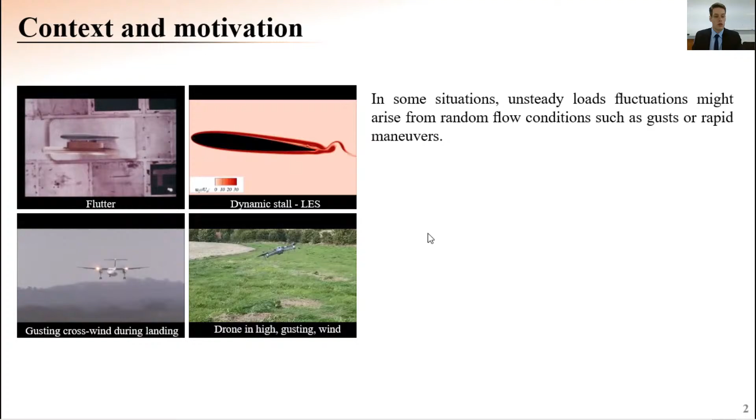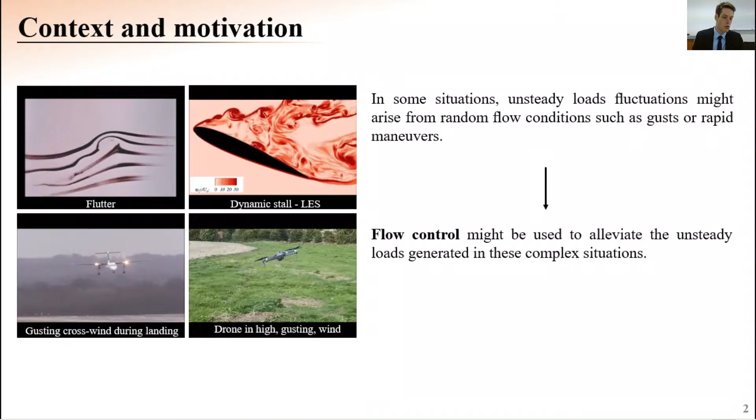I will present first the context and motivation of this work. From this video you see that in some situations, unsteady load fluctuations may arise from random flow conditions such as gust or rapid maneuver. Flow control is a valid tool that may be used to alleviate the unsteady loads generated in this complex situation, among other widely used tools. However, to improve control effectiveness, it is fundamental to understand and master the transient effects induced by actuation, and this is the main objective and core of this thesis.

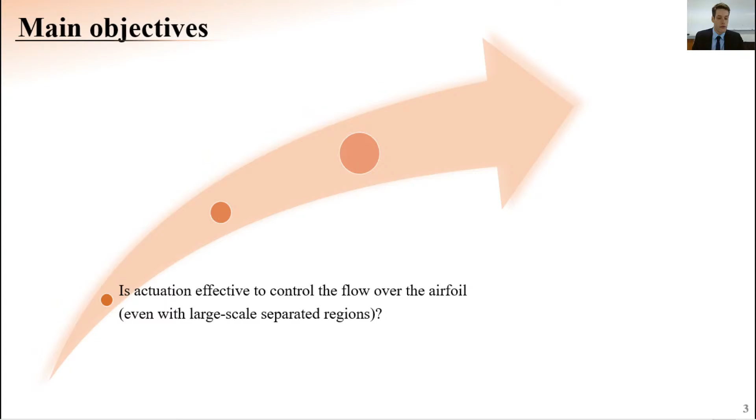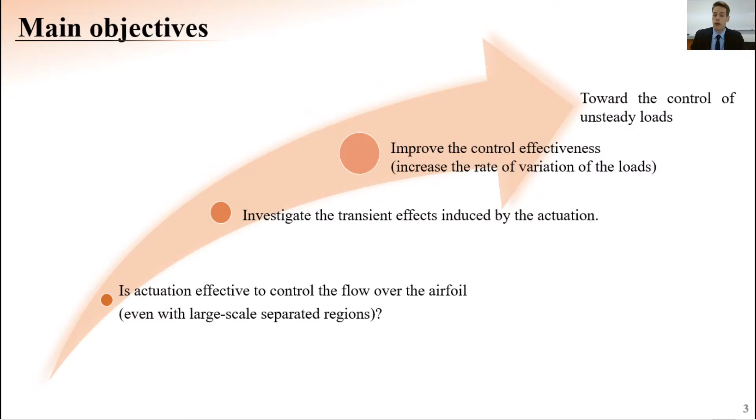In particular, we will start by investigating the effects of flow control over the airfoil, and whether it's effective even with large-scale separated regions. Then in the second part of this work we will investigate the transient effects induced by actuation, which is the main objective of this work, with the goal of improving control effectiveness, or in other words increasing the rate of load variation, with the perspective of giving useful insights toward the development of control strategies usable in real unsteady situations.

First I will present the background of this work. Then I will give some details of the experimental setup used to carry out the experiments, and then I will talk about the results. In particular, I will present first the baseline flow configuration over the airfoil, then the time-averaged effects of the control. Then we will go into the main part of this presentation, about the transient effects induced by actuation. So let's now talk about the background.

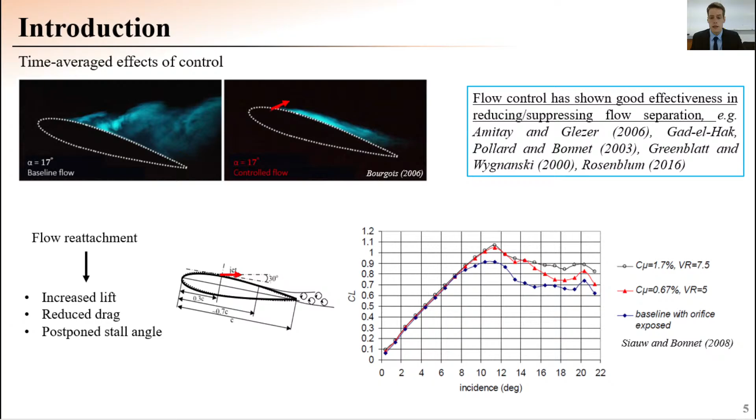This picture was obtained by Siauw under the direction of Professor Bonnet in 2008, and we see that if the actuation is applied, in this case from 30% of the chord, we are able to increase the maximum lift, but even the post-stall lift.

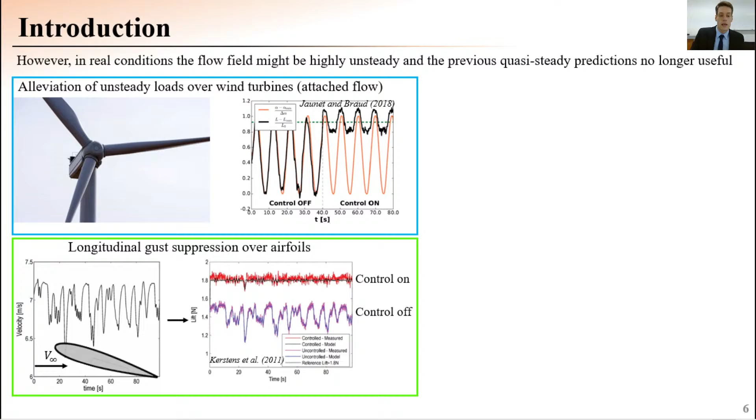However, in real conditions, the flow field may be highly unsteady, and so the previous quasi-steady prediction may no longer be useful, as you can see in these cases where I present several situations where the airfoil experiences unsteady loads. For example, in the case of wind turbines, or even when the airfoil experiences longitudinal gust, or in the case of a helicopter rotor, when the airfoil experiences dynamic stall.

In this case, control is used in an unsteady manner in order to alleviate the unsteady loads generated in these phases. So flow control may be exploited to alleviate unsteady loads in these cases, and so we need to exploit the transient effects of actuation to improve the control authority. For this reason, it's first of all necessary to investigate the transient phenomena induced by actuation. This is the main objective of this work, as I said before.

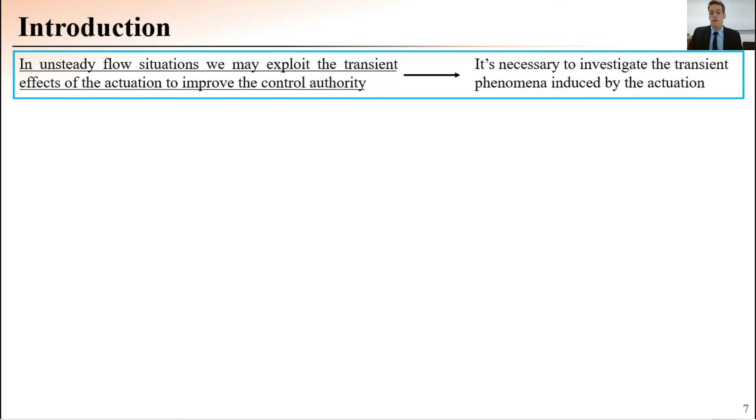For this reason, many authors in the last years have investigated the effects of the actuation onset and removal. For example, I mention here the work of Amitay and Professor Glezer, where they investigated the transient effects induced after the actuation onset removal.

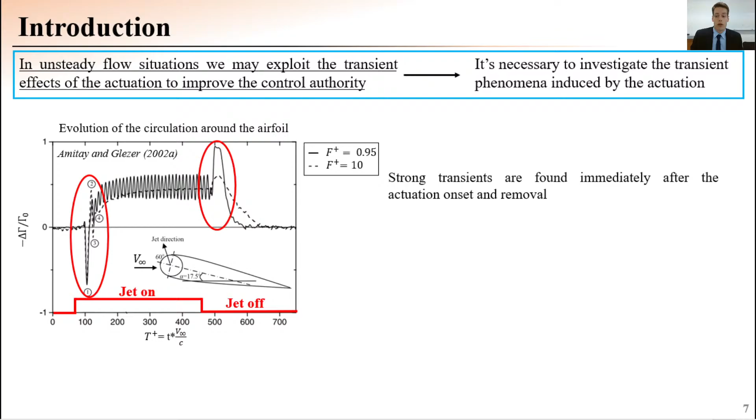In this picture, I present the variation of the circulation around the airfoil as a function of the normalized time T+. The normalized time is basically the ratio between the time in seconds and the convective time over the airfoil. You see that strong transients are found immediately after the actuation onset removal, and in particular, these transient effects were associated to the shedding of large-scale vorticity concentrations of alternate sign.

Another particular case that was very useful to understand the transient effects of the actuation is the case of single pulse actuation, which has a characteristic time scale very short compared to the convective time over the airfoil. Also in this case, you see that the single pulse actuation can induce a very strong circulation fluctuation around the airfoil that corresponds also to a lift fluctuation.

In particular, the maximum lift value is obtained after about 2 convective time scales. This time scale is quite short, but can be very long if the control is intended to control unsteady loads over the airfoil that can have characteristic time scales even shorter than the convective time over the airfoil.

For this reason, we asked if it's possible to enhance the control effectiveness by reducing the time to attaining the maximum lift, or in other words, we try to increase the rate of variation of the aerodynamic loads. This is the main objective of this work.

But let's first of all analyze the experimental setup that we used to perform the experiments. The experiments are performed in the subsonic wind tunnel of ISAE-ENSMA using a NACA 0015 airfoil model, having a chord of 35 centimeters and a Reynolds number of about 500,000. The transition is triggered at the leading edge in order to obtain a fully turbulent flow field along the chord.

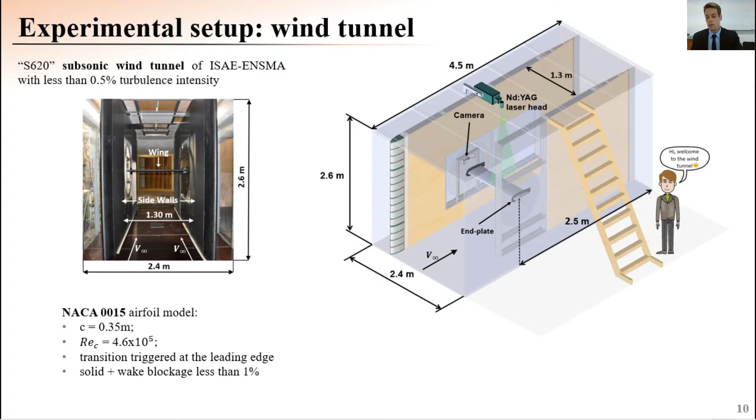The airfoil is mounted between 2 rotating discs that allow changing the incidence, and end plates are used to limit the interaction between the wall boundary layer and the surface of the airfoil. With this setup, we are able to increase the effective aspect ratio of the airfoil and to produce a 2-dimensional flow distribution along the span.

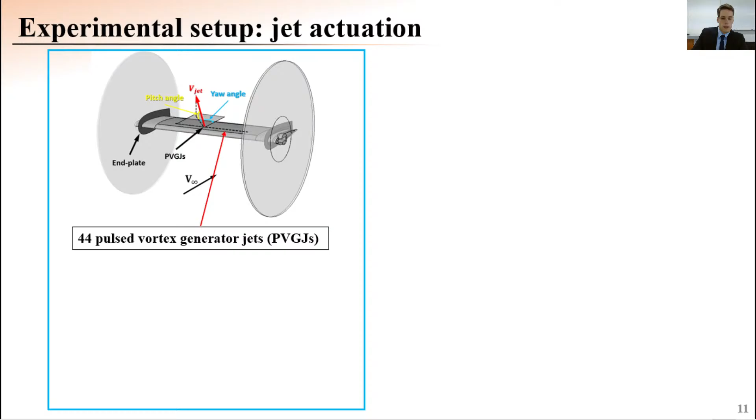The actuation instead is performed using 44 pulsed vortex generator jets that are embedded at 30% of the chord and are inclined with a yaw angle of 60 degrees and a pitch angle of 30 degrees. They are able to produce streamwise vortices, as you can see here, downstream, that enhance the mixing between the outer and the inner layer of the boundary layer and promote flow reattachment.

This setup in particular has been chosen from the literature because it allows for the maximum streamwise vorticity accumulation downstream of the orifice.

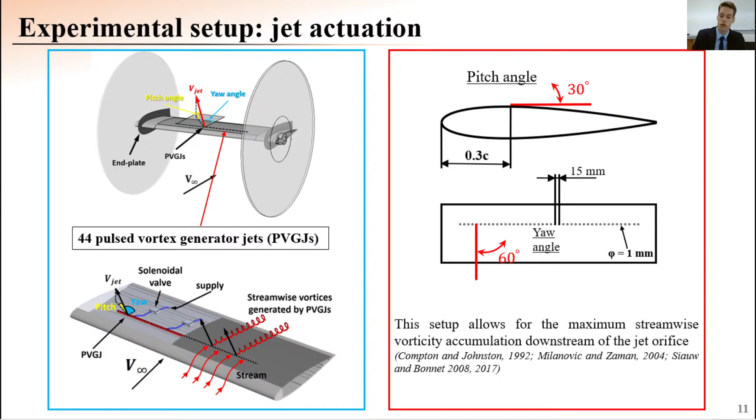The performance of the actuators is measured using hot wire anemometry, very close to the jet exit orifice. Here you can see the actuation response to several control laws. In particular, you see the response to single pulse control and to periodic control.

You see that the response delay is very short, and in particular in these experiments, a maximum jet velocity of 5 times the free stream velocity has been chosen because it was able to completely reattach the flow even at larger scale configuration, at high incidence with large scale separated regions.

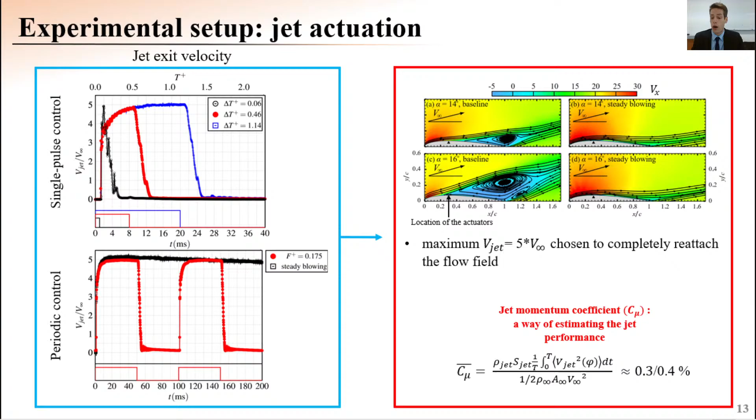With this maximum velocity, we were able to measure the performance of the actuation using the jet momentum coefficient, which is the ratio between the momentum flow rate of the jet actuation system and the momentum flow rate of the free stream. In this setup, it has been about equal to 0.3/0.4%, so it's very low.

To explore the transient phenomena induced by actuation, we performed unsteady static pressure measurements and flow measurements using PIV, both synchronized and phase-locked to the actuation trigger signal. It's important to know that all the PIV measurements I will present later are phase-averaged based on 300 images in order to reduce the uncertainty.

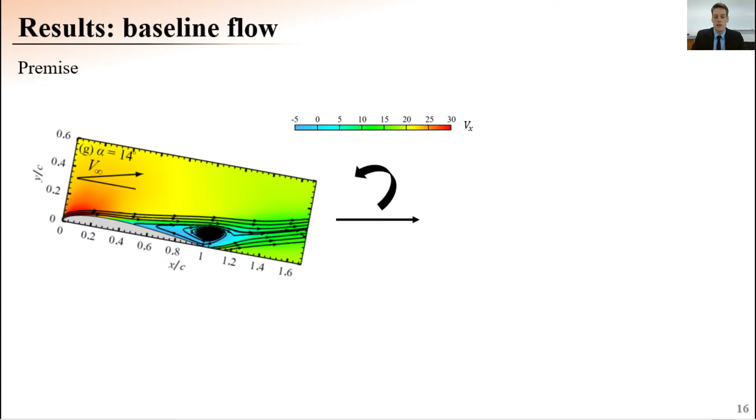So let's now go into the results. But first, I want to make a small premise before presenting the baseline flow configuration around the airfoil. We know that the flow in the wind tunnel is horizontal, so the free stream is parallel to the ground, and the airfoil rotates to create an incidence angle. But in this presentation, I will always rotate the frames in order to have the chord horizontal, for sake of simplicity of representation.

With this in mind, we can now analyze the streamwise velocity distribution around the airfoil. We see that for incidences below 11 degrees, the flow is fully attached, while a partially separated region appears for incidences above 12 degrees, and it reaches 75% of the chord at 16 degrees.

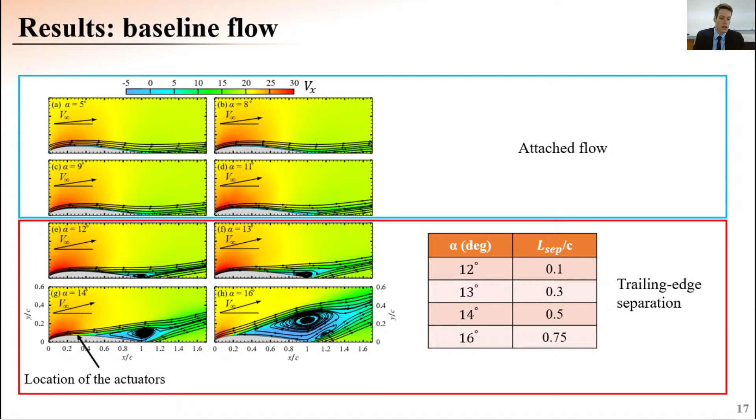For this reason, it seems reasonable to place the actuators at 30% of the chord, in order to be upstream of the separated region even for 14 or 15 degrees. So let's now analyze the time-averaged effects of the control, which is the starting point of our investigation.

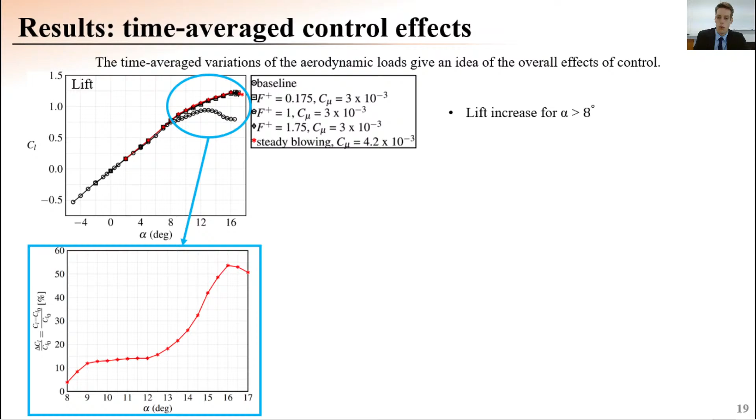We notice here the variation of the lift as a function of the incidence angle for several actuation laws. We applied both periodic control and steady blowing, shown in red, and we see that the actuation is able to increase the lift for incidences above 8 degrees, as shown in the picture below presenting the percentage variation of the lift.

The stall angle is also postponed from 13 degrees in the baseline configuration to 16 degrees in the controlled configuration. The highest increase of lift is obtained at 16 degrees because we are able to reattach a very large scale separated region, allowing us to strongly change the aerodynamic camber of the airfoil.

But not only the lift is affected by the actuation, but also the drag, which is the pressure drag in this case. It's remarkably changed above 8 degrees, as before, but it's interesting to notice that we have a pressure drag increase for incidences below 14.5 degrees, and a pressure drag decrease for incidences above 14.5 degrees.

Let's explain this behavior by analyzing the pressure distribution around the airfoil at 14 and 16 degrees. We see here there is a big difference in the pressure distribution around the airfoil.

We see that there is a very strong suction near the leading edge in the case of 16 degrees, because, as seen before, in this situation we are able to reattach a very large scale separated region. The change of aerodynamic camber we obtain increases the suction near the leading edge. This action results in pulling the airfoil in the upstream direction, corresponding to a drag decrease.

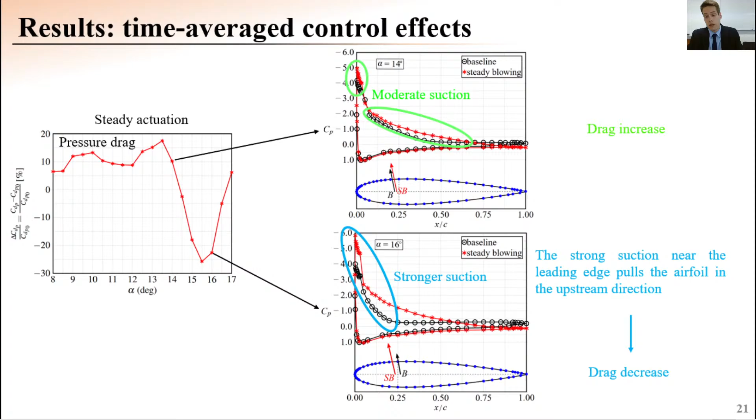In the case of 14 degrees, instead, we obtain a drag increase because the predominant effect of the actuation is a suction near the half chord, which pulls the airfoil in the downstream direction, increasing the drag.

Not only the lift and drag are affected by actuation, but also the maneuverability. We see here the variation of the pitching moment coefficient, measured with respect to the quarter chord, with the incidence angle, and there is a remarkable moment variation for incidences above 8 degrees.

There is a pitching moment decrease for incidences below 14.5 degrees, while the opposite occurs for incidences above 14.5 degrees. To explain this phenomenon, we need to analyze the variation of the center of pressure induced by actuation.

Let's first remember what the center of pressure is: it's the point where the resultant of the aerodynamic force is applied. Since the moment is measured compared to the quarter chord and is positive in the pitch-up sense, if the center of pressure moves downstream, it means that the moment is decreasing. Indeed, we see this here for incidences below 14.5 degrees.

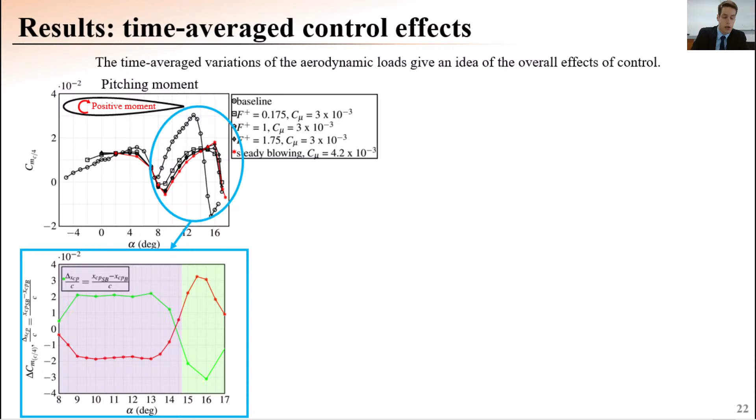While for incidences above 14.5, the pitching moment is increasing because the center of pressure is moving upstream. We can visualize this by analyzing the distribution of pressure around the airfoil for these two incidences, and we see that at 14 degrees the center of pressure moves downstream because of the suction near the half chord, which pushes the center of pressure downstream, while for 16 degrees the strongest suction near the leading edge is able to change the center of pressure, moving it upstream, which corresponds to a moment increase.

Another important feature we can notice from this picture is the postponement of a strong nose-down pitching moment from 13 degrees in the baseline configuration to 16 degrees in the actuated configuration. This corresponds to postponing the stall angle of the airfoil, confirming what we already observed with the lift coefficient, also with this curve.

So in this first part of the presentation, we have analyzed the time average effects of the actuation. In particular, we have seen that the actuation is able to increase the lift and reduce the drag for high incidence, which corresponds to beneficial effects for efficiency, but also affects the maneuverability of the airfoil. Indeed, we have seen that actuation has a very strong influence on the pitching moment.

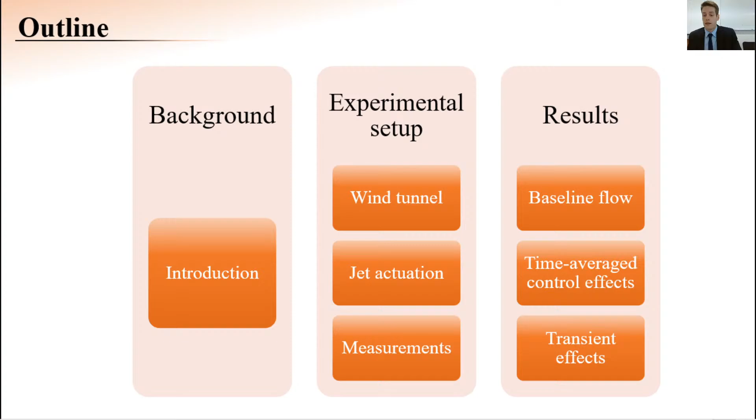Let's now go into the main part of this work, because the understanding of the time averaged control effect is very important, but is very common in the literature, and it's not the main objective of this work. We will focus instead on the transient effects induced by actuation. Let's now investigate the transient effects of actuation, and try to answer our previous question: is it possible to enhance the effectiveness of the actuation using a fine-tuned control?

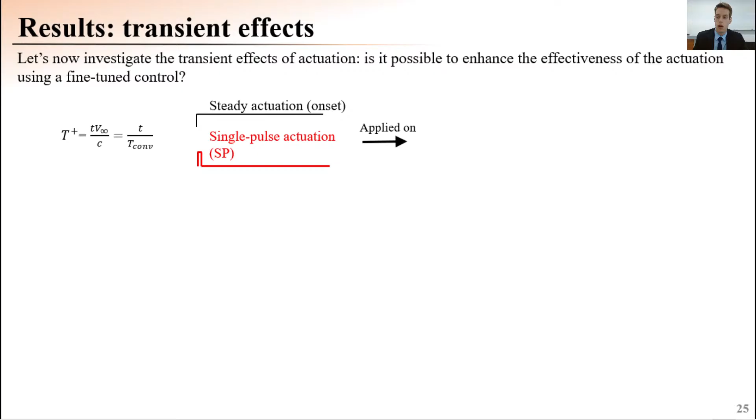For this reason, we test many actuation durations, in particular many single pulse actuation durations, compared with the steady blowing onset. We test this configuration both over attached and partially separated flow fields, but for simplicity, I will only present the case of a partially separated case at 14 degrees, where separation starts from mid-chord, because it's the most representative case.

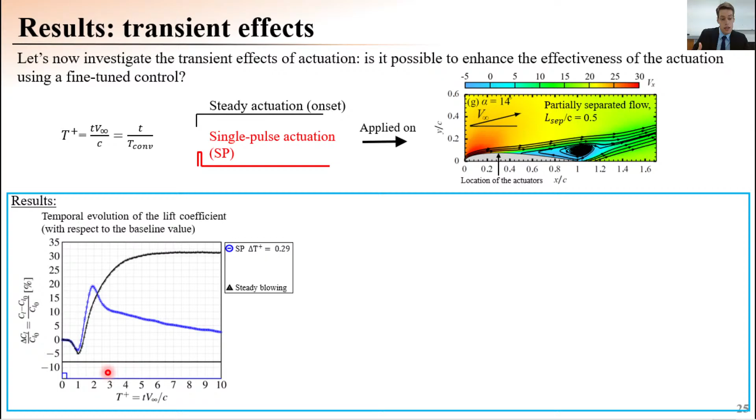What is the result? The result can be seen by analyzing the evolution of the lift coefficient as a function of the normalized time t+. In particular, we see that the single pulse actuation induces a very different lift response compared to the steady blowing.

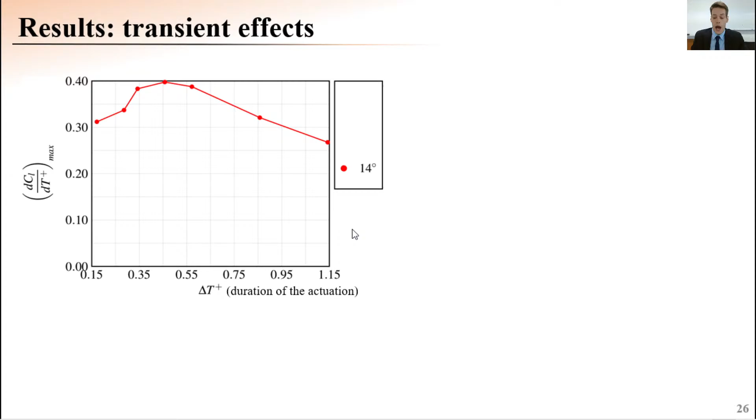We can also notice from this picture that the maximum rate of lift variation is obtained for a pulse duration of about 0.5, in particular for delta t plus 0.46. This can also be understood by analyzing this other image, which represents the variation of the maximum derivative of the lift coefficient as a function of the duration of actuation. We see that for 14 degrees, the maximum rate is obtained for delta t plus 0.46.

This is also the case for other partially separated flow fields for incidences above 12 degrees, while a different behavior is found for 16 degrees, where the actuation is applied from inside the separated region, inducing different flow dynamics. For this reason, we cannot clearly evidence the maximum, while for other partially separated configurations, we can see that the maximum is obtained for an actuation duration of about delta t plus equal to 0.5.

For attached airfoils, instead, the maximum derivative is only slightly affected by the pulse duration, and for this reason, we will not go into details of this case, but you can find all the more details in my PhD dissertation.

So let's consider the case of 14 degrees, being the most representative, and let's try to explain what is the physical mechanism responsible for the improvement of the rate. First, to explain this, we need to compare the single pulse actuation of delta t plus 0.46 and the steady actuation, to explain the dynamic and why the response of the flow is so different between these two cases, and then we will try to explain what is the physical mechanism that leads to maximizing the rate of lift increase.

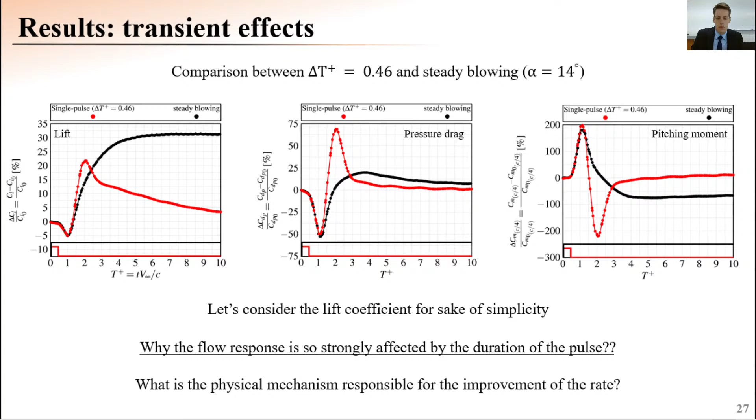It's important to notice that not only the lift coefficient is affected by the single pulse actuation, but also the pressure drag and the pitching moment, which are affected even more strongly than the lift. However, we will talk about the lift coefficient for sake of simplicity, and we will try to explain the physical mechanism responsible for the improvement of the rate.

We can explain this by analyzing the evolution of the flow field over the airfoil, represented here as the distribution of the span-wise vorticity concentration over the airfoil. In the baseline configuration, the flow is separated from half chord, and a negative layer of vorticity is detached from the airfoil from half chord.

This is the signature of the separated shear layer. If I play the video now, you see that after the actuation onset, the separated shear layer is shed downstream, while upstream the flow becomes fully reattached over the airfoil as a consequence of the single pulse actuation.

If we now compare this flow response to the case of the single pulse, we notice very different behaviors. In the case of the single pulse actuation, we notice the formation of an unsteady separation bubble near the half chord, which moves downstream up to reach the trailing edge, and then it opens.

So we can now explain what is the effect of this bubble on the lift evolution. For this reason, I put on the right of this figure the evolution of the lift and of the derivative of the lift that I showed before.

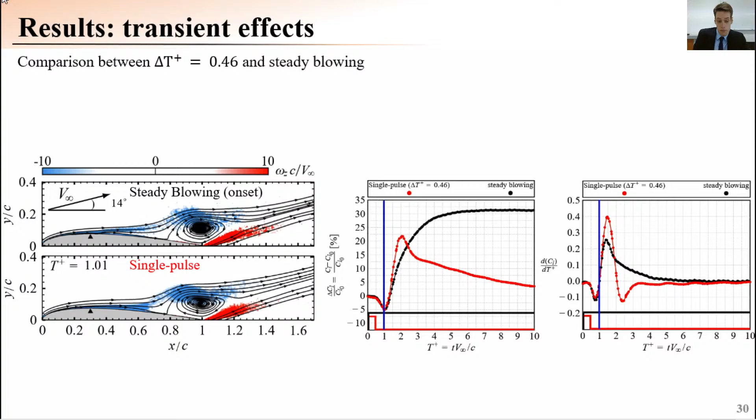If I play the video again, we see that at the same phase when the bubble is created, we also increase the rate of the lift compared to the steady blowing. So it seems there is a very strong correlation between the formation of this bubble and the increase of the rate of lift variation. We want to understand why this bubble induces this strong increase of the rate.

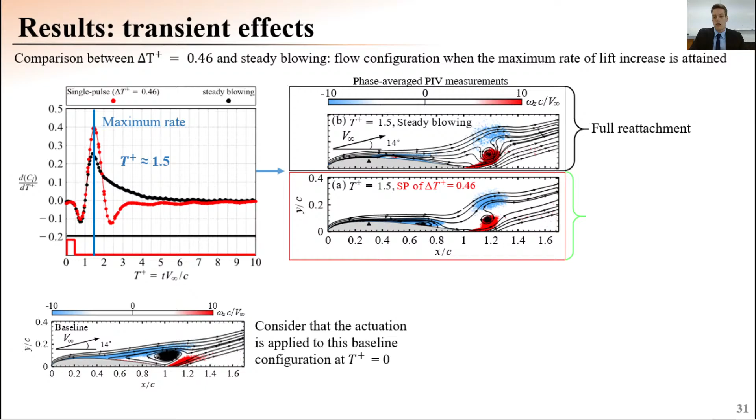For this reason, we analyze the pressure distribution over the airfoil at, for example, an instant of time when the maximum is obtained, remembering that in the case of the single pulse, we obtain the formation of the bubble.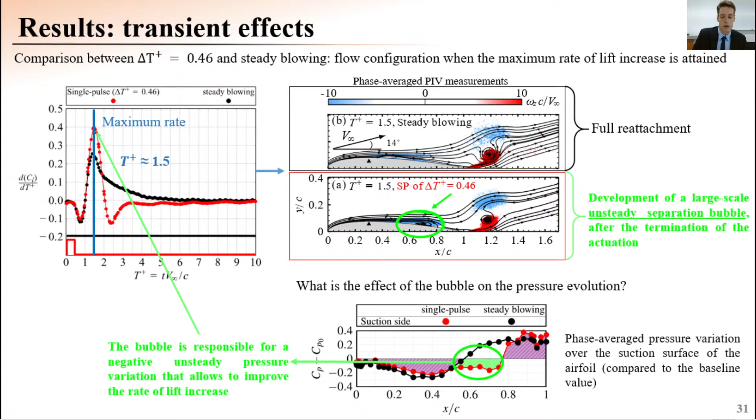So we have understood that the bubble has a very big effect on the lift evolution. But to characterize the dynamical evolution of the flow field, we need to follow the progression and evolution of this unsteady separation bubble. In other words, we need to detect the instantaneous position of the reattachment point downstream of the bubble, which is represented in the case of streamlines as a moving saddle point.

However, it's important to notice that we cannot use the interpretation given by streamlines, because streamlines are calculated in an Eulerian field, an Eulerian perspective. That means they are calculated with a reference system which is fixed with the airfoil. In an unsteady case, they can really diverge from the actual particle trajectories, and so they are not representative of the real transport behavior over the airfoil.

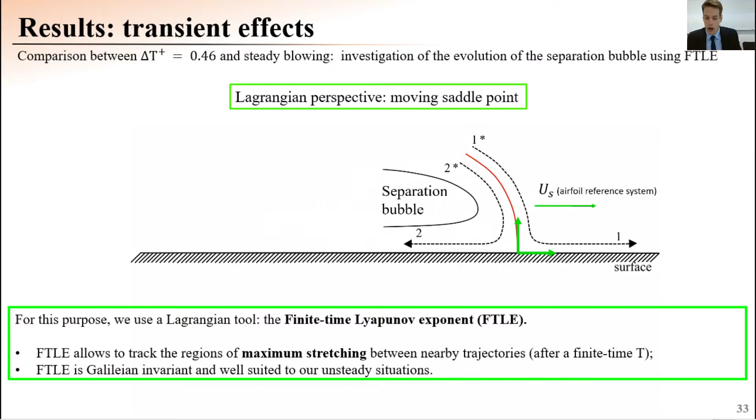For this reason, we need to analyze the flow field with the Lagrangian perspective. That means we need to use a reference system which is fixed with the saddle point, moving with the saddle point - in this case, the reference system in green. For this reason, we use the Lagrangian tool, the finite-time Lyapunov exponent, that allows us to track the region of maximum stretching between nearby trajectories after a finite time t. The FTLE is Galilean invariant, and so is very well suited to our unsteady situation.

Let's give a brief introduction to the FTLE. In particular, if we consider the advection of a grid of particles using forward integration from time t0 to time t0 plus t.

If we consider that phi is the flow map that tracks the movement of this particle, we can calculate the spatial gradient, for example by central differencing of the flow map. It's very well known from the literature that the maximum stretching between nearby trajectories occurs in the unit direction associated with the largest eigenvalue of the matrix A transpose A, that we call lambda max.

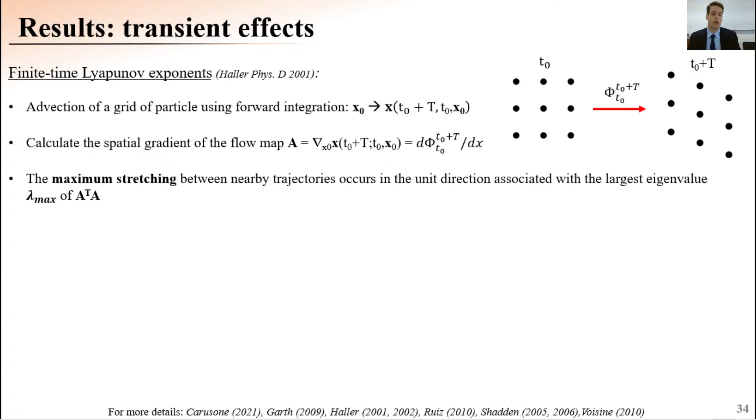With this in mind, we can now define the FTLE as the logarithm of the square root of lambda max for 1 over the integration time t. The FTLE sigma is calculated in every point in the PIV domain at every instant of time, and it provides the maximum exponential divergence over a finite time interval, t0 to t0 plus t.

So if we are able to calculate the FTLE value in every point of our PIV field, we can detect the ridges of the FTLE field, represented here in red. The intersection between this ridge and the surface of the airfoil gives the instantaneous position of the attachment point in a Lagrangian perspective.

In our study, we calculated the FTLE using phase averaged PIV fields based on 300 images each, and the time step to compute the particle trajectory was chosen as 0.25 millisecond, with the flow integrated using the Runge-Kutta fourth order algorithm. An integration time of 25 milliseconds was used to calculate the FTLE because it was enough to clearly reveal the unsteady topological evolution of the flow field.

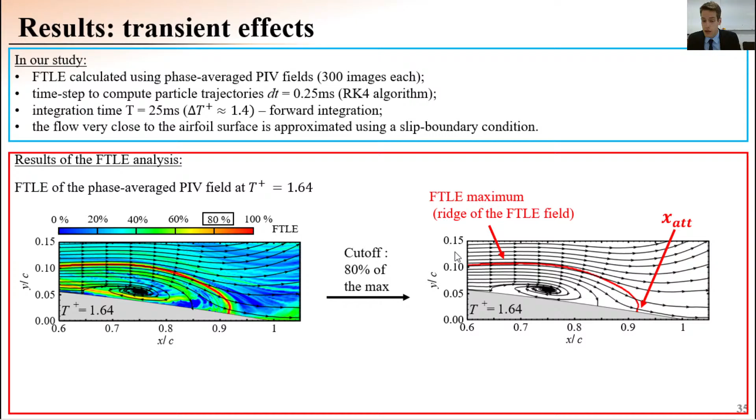You see here this red line that unambiguously reveals the position of the attachment point over the airfoil. The reattachment point is calculated on a line very close to the airfoil surface and very close to the region resolved by PIV, with a spatial resolution of about 0.2% of the chord.

At t plus equal to about 2, it reaches the trailing edge. It's not a coincidence that at this instant we also obtain the maximum value of the lift. We can remember that this bubble is responsible for a negative unsteady pressure over the suction surface. When this bubble reaches the trailing edge, this negative region of pressure extends all over the suction surface of the airfoil, providing the maximum lift.

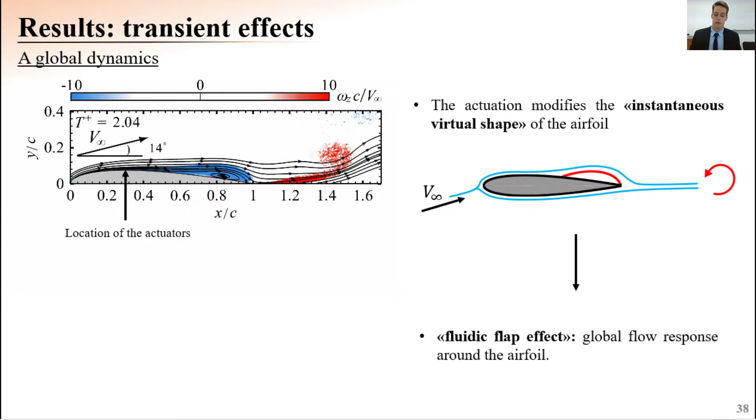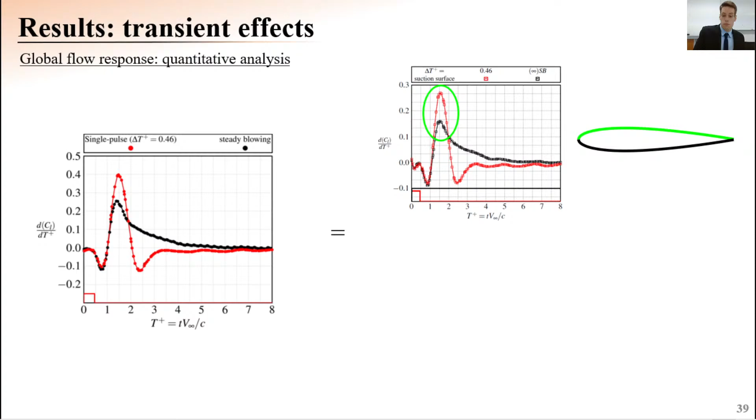However, to take into account the integrated effect of all the pressure over the airfoil, we split the contribution to the derivative of the lift coefficient into two components: the component corresponding to the suction surface and the component corresponding to the pressure surface of the airfoil. In both situations, both suction and pressure surface contribute to the improvement of the rate of lift increase, so the phenomenon is global.

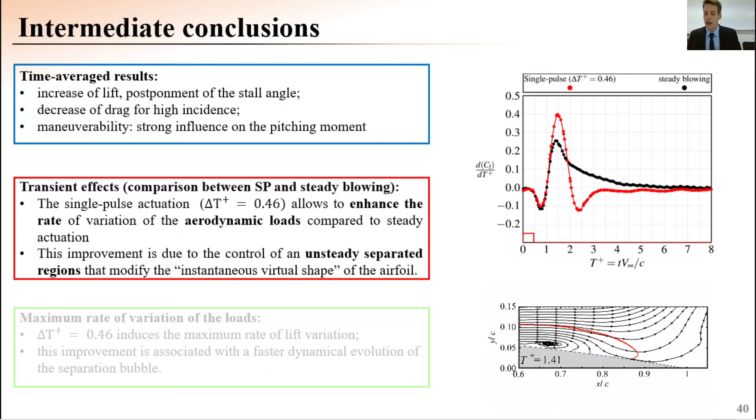In this second part, we compared the transient effects induced by single pulse actuation and steady blowing. We have seen that the single pulse actuation is able to enhance the rate of variation of the lift, or in general of the aerodynamic loads, compared to the steady actuation. This improvement is due to the control of the formation of an unsteady separated region that modifies the instantaneous virtual shape over the airfoil.

Let's now go into the third part of this presentation. Having understood the physical mechanism leading to the increase in lift rate, we now want to understand the mechanism leading to maximizing the rate of variation of the loads.

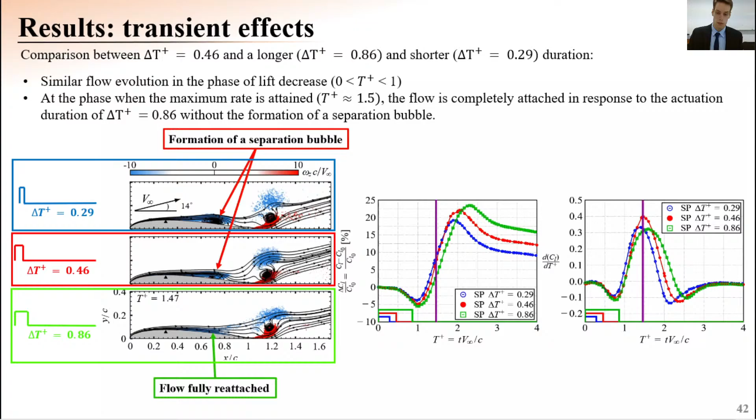However, it's still strange that for both 029 and 046 we have the formation of the bubble, but we find very different loads and very different rates in these two cases. In particular, 046 induces higher rate compared to 029. So we want to explain this by analyzing the evolution of the separation bubble.

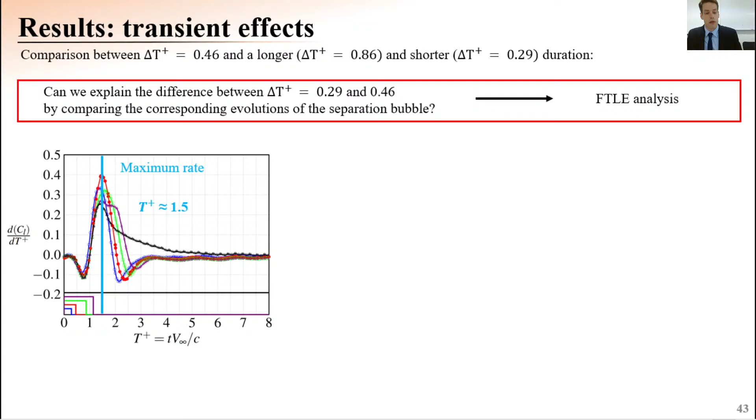Using our dear friend, the FTLE tool, we take an instant of time at t plus 1.5 and compare the FTLE fields for these two cases. Since this actuation is switched off earlier for 029, also the bubble is formed earlier. So it's expected, and proved by this picture, that the reattachment point is closer to the trailing edge for the shorter actuation duration, downstream compared to delta t plus 046.

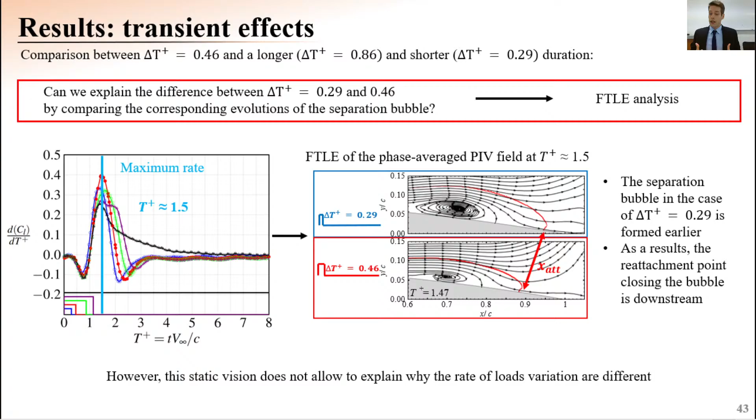This is proved by analyzing the evolution of the attachment point for these two cases. The red line, corresponding to 0.46, shows a faster movement of the attachment point downstream of the bubble compared to the blue one, 0.29. The velocity in the case of 0.46 is 20% of the free stream velocity, while for 0.29 it is 12%. So we find a much slower evolution for 0.29 and a faster dynamics for 0.46.

What is the effect of this faster dynamical evolution of the bubble for 0.46? Since we have a faster progression of the attachment point downstream of the bubble, we expect, and also proved, a higher rate of variation of pressure per unit time, which corresponds to a higher lift rate. But it's now time to explain why we have such different flow dynamics between these two cases.

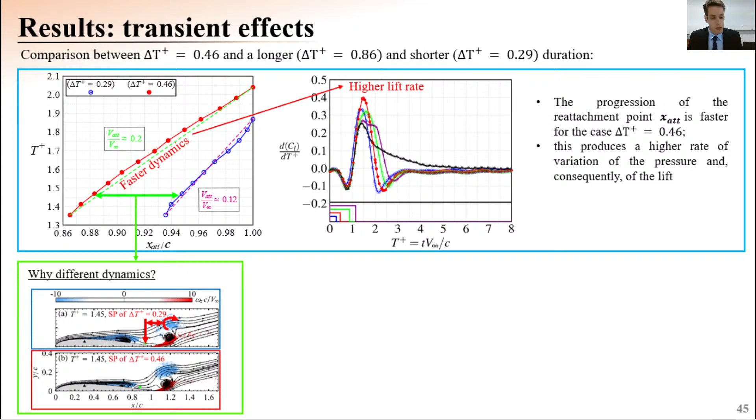We can explain this by analyzing the evolution of the flow field at a generic instant of time, for example at t plus equal 1.45. If we analyze the vorticity distribution for these two cases, plotting the corresponding position of the attachment point downstream of the bubble, we see that in the case of 0.29, the reattachment point is closer to a larger scale negative vorticity concentration downstream of the trailing edge.

And what does it mean? It means that, as we have seen in the dissertation, the shedding of this larger scale vorticity concentration associated with the shedding of the separated shear layer induces an adverse pressure gradient upstream.

Since this point in the case of 029 is closer to this large scale negative vorticity concentration, it's expected that it feels a higher adverse pressure gradient than in the case of 046. For this reason, it's expected to move slower than in the case of 046.

So in this third subsection, we have compared three durations of the single pulse: 029, 046, and 086. We have seen that 046 induces the maximum rate of lift variation because the bubble formed in this case has a faster dynamical evolution compared to the shorter case.

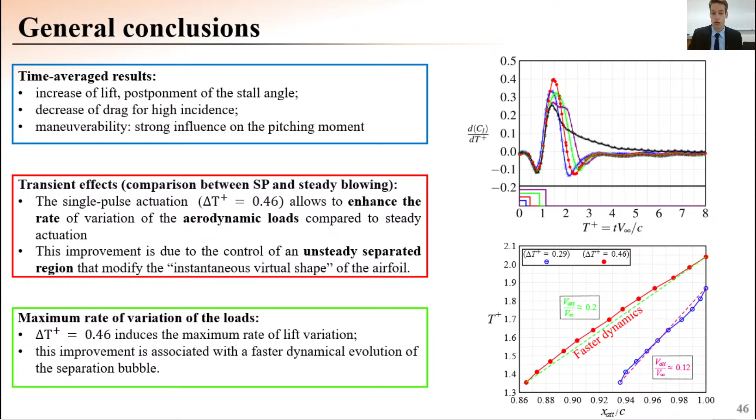While in the longer duration test, the bubble is formed too late, very close to the phase when the maximum lift is obtained, and for this reason it has no beneficial effects on the lift increase. So it's important that the optimal duration of the actuation is a compromise between the instant at which the bubble is formed and the corresponding flow evolution and pressure distribution on the airfoil at this phase.

I hope that with this presentation and this work, we have given useful insights into understanding the transient effects of the actuation. However, we can still perform some parametric investigation to find the parameters playing the major role in enhancing the rate of variation of the aerodynamic loads.

For example, the time when the bubble is formed, or the pressure distribution, the pressure gradient at the point when the bubble is formed. Mastering these actuation parameters can be very useful to implement physics-based closed-loop control strategies that can improve the actuation performance even beyond the current limitations.

However, the control strategies that have been tested in this situation have been applied over well-defined quasi-steady flow configurations, as we have seen for the case of 14 degrees, when the separation appears from half chord. However, it will be very interesting to test if these control strategies are effective in real unsteady flow configurations.

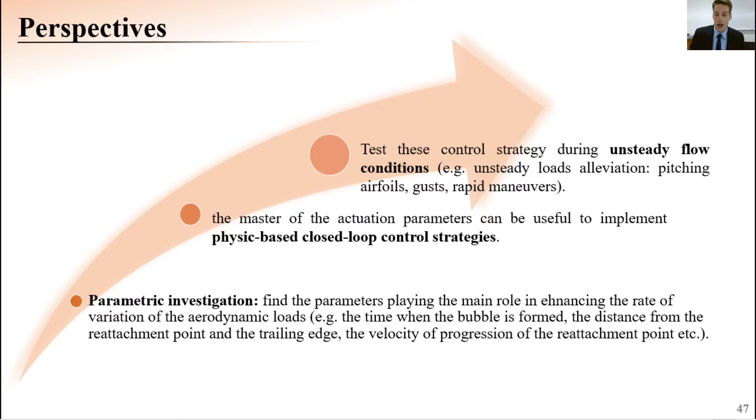For example, during pitching airfoil, so dynamic stall, or during gust, or during rapid maneuver. And so we can test if, in this situation, these actuation laws that we tested are able to alleviate the unsteady loads.

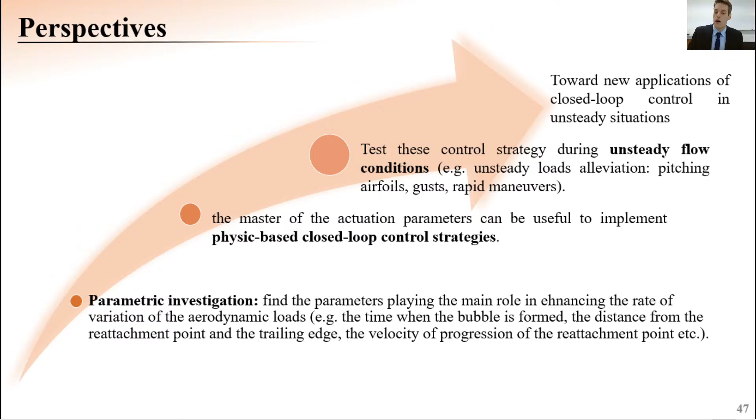For example, we can think to apply our unsteady control to alleviate dynamic stall over helicopter rotor, to alleviate the unsteady loads in the case of wind turbine blades, or even to control the maneuverability of aircraft, for example in the case of a drone, or even to control the maneuverability of a dirigible.

So I want to thank you very much for your presence here, and I'm looking forward to your useful insights and comments that will surely help to improve my work. Thank you very much.

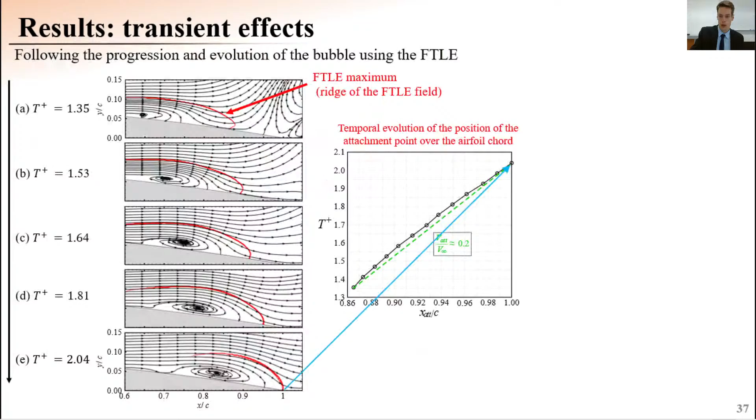Yes, for example, it was here. You can see that this red line, this ridge, actually separates two different regions of the flow field that have a very different topological behavior. One of the most important properties of this red line is that there is no mass flow rate between the lines. So if you calculate the instantaneous separation over the airfoil, you want to divide the dead air zone into the separated region and the flow with a certain velocity.

You can do this by analyzing the FTLE value, which gives you exactly the difference between these two regions. It's an indicator of the real topological behavior, or real flow transport over the airfoil. For this reason, it's more accurate to predict the instantaneous position of the attachment points compared to streamlines, so we preferred to use FTLE to detect the position of the reattachment point. I don't know if I was quite clear or not.

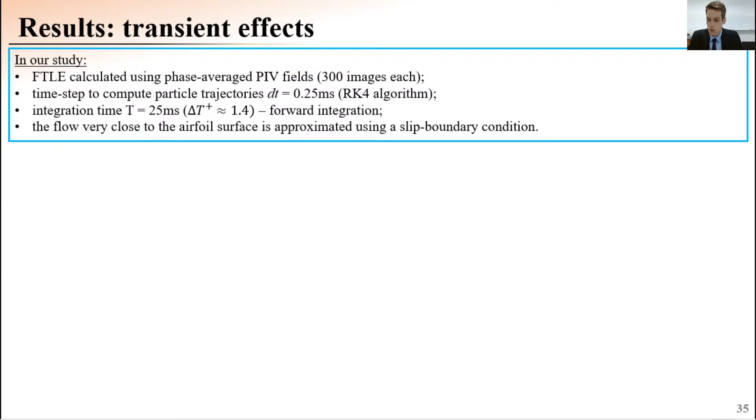And the difference between, you have three plots there, and this is all from memory: the transient actuation was nominally smooth, you didn't get the oscillations, and the time periodic actuation had slightly different CMU, however you defined it. But the time periodic actuation yielded higher lift and the same drag as the pulse actuation.

So obviously I'm biased towards pulse actuation, but you look at this result, and if I'm Airbus or Boeing or whoever, in that order probably because you guys are in France, I'm asking myself, why should I bother? I think it's this plot, right? I'm asking myself, why should I bother?

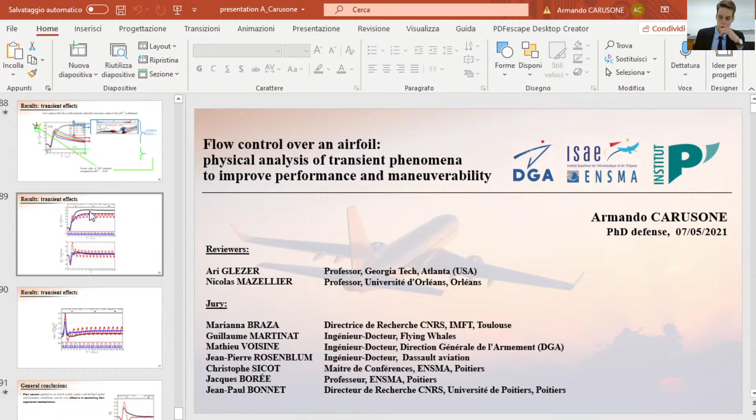I mean, I can get slightly better results with the time periodic actuation. Yes, the CMU is a little bit higher, but the drag is the same. Actually, with higher CMU, I'm getting more lift. Right, of course. There's less hardware, I don't need to worry about this pod stuff and so on. Why should I even bother with that?

You're completely right, indeed it's not very easy to sell this product in this situation. Now you know why I have a lot of white hair.

No, I want just to reply. For this reason, I carefully read your comments, and so I prepared a slide to try to explain why Boeing should buy my product. I should buy it first, but it's okay. I'm sorry. No, anyway, you are completely right.

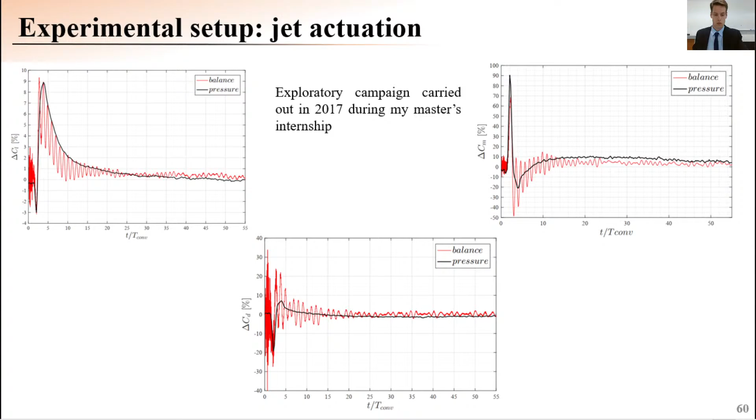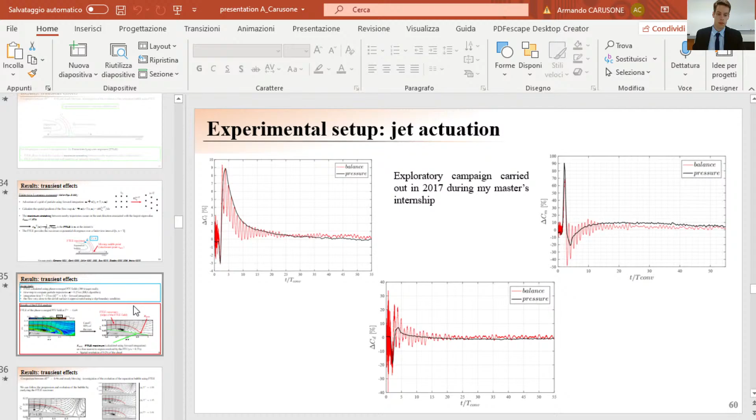You said that you have a slip condition that you use close to the wall, so it's like the method is using a potential flow. Is that correct? Is it coming from the method itself, or because you have no way of making something else?

Actually, near the surface of the flow, although we used a very special paint for PIV and took all the care to ensure there were very few laser reflections, the flow in a region of 5 millimeters height next to the surface was strongly affected by laser reflection. So we could not accurately analyze the flow field in this region using PIV. It was too inaccurate; the uncertainty was very big, and I was not sure the vectors in this region were right even with all the care we took. For this reason, we preferred to replace this 5 millimeter height region with a potential flow field calculated basically using a slip boundary condition.

With this method, I also tested another kind of measurement: I tried putting the velocity on the wall equal to 0 to test if there was any difference, and also tried without this boundary condition. We did not see a strong difference in the position of the red line, because the scales of the region resolved by the slip boundary condition are very small compared to the transport scales of the phenomenon. So we don't have any problem detecting the red line even with this small assumption near the wall. It worked, and we had no problem compared to other methods, or without it - that's why we used it.

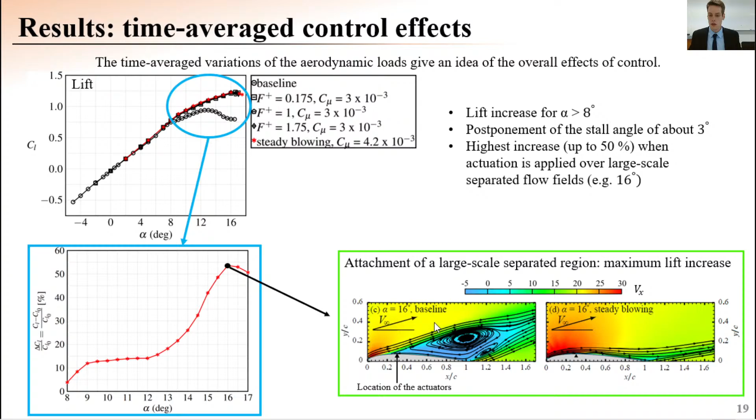However, if you take into account this configuration, we see that the flow is fully attached. But if we take the pressure variation in this case, we see that there is actually a very strong suction near the leading edge, and this is the same effect as what we registered in the steady case. So even if there is no bubble downstream, we have a strong suction near the leading edge.

So actually, this suction is not related to the presence of the bubble, but is related to the fact that by creating the bubble and modifying the flow in the near wake, we are changing the instantaneous aerodynamic shape of the airfoil - this is something I've read a lot about in the papers of Professor Glezer. In other words, we are increasing the camber.

By increasing the camber, we are moving the stagnation point toward the trailing edge, and this corresponds to having an airfoil with a higher camber, which will result in a higher suction near the leading edge, even if there is no bubble at all. So it's just the aerodynamic shape of the airfoil that induces this change, it's not related to the bubble.

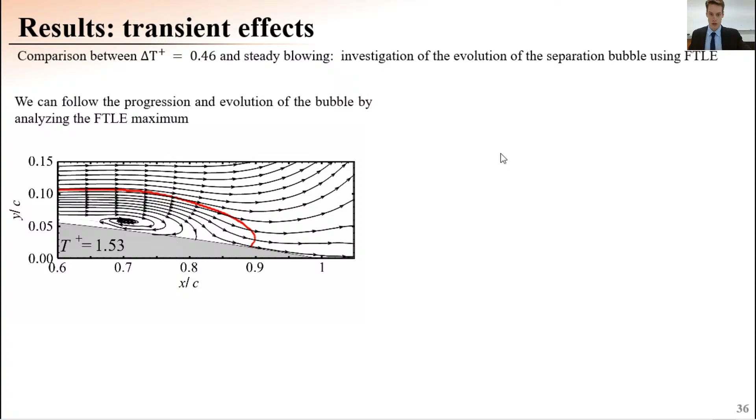Actually, you see that this bubble, this reattachment point is not only moving toward the trailing edge, but the bubble itself moves toward the trailing edge. And so there is a closed part which is also moving. And indeed, just upstream of this bubble, the flow becomes reattached. So what we obtain is what I showed in the figure just here: a closed bubble with the flow just attached upstream, and a shedding of vorticity in the near wake.

And actually, if we compare these schematics that I have shown here with the baseline case, it's like we are operating with an airfoil with a higher camber, and the stagnation point moves toward the trailing edge. So we have suction in this zone because we have reattachment flow, and also because we changed the camber.

However, this suction will also continue below the bubble, because since we have a separation bubble, the pressure is fixed at the point of separation. So actually we have an unsteady pressure, a negative pressure that will develop below the bubble. And when the bubble moves downstream, we have suction here because the flow reattaches, suction downstream, below the bubble. So we extend the suction all over the surface. I prepared another slide to show this.

Here, for example, we see that at T+2, the bubble has almost reached the trailing edge. And if we compare the pressure evolution for the lift, we see that the negative variation of the pressure has reached the trailing edge almost. Indeed, before the bubble, the flow is attached, so the pressure is decreasing because there is suction. And downstream, below the bubble, the pressure stays at almost the same value as at the separation point. So we have a depression even below the bubble, which reaches almost the trailing edge.

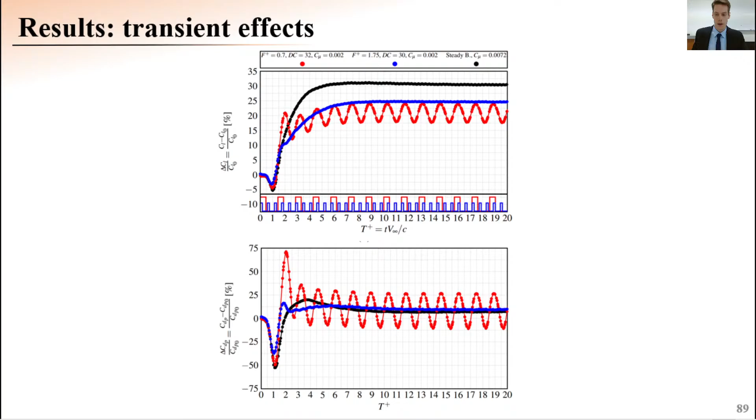And my last question is about the point you took at the end of chapter 5, close to the trailing edge on the pressure side. This is interesting because, thinking in terms of application, you need a sensor to make some feedback control, and this was quite interesting.

However, I'm not very clear about why this point is so interesting, because if you look at figure 5.9 where you compare the evolution of the pressure, at this point close to x over c equal 1, you don't see much difference between pressure side and suction side. So this point seems to have no effect on the lift compared to others which are much more sensitive to the pulsation effect. Can you clarify this point?

Yes, I was expecting this question, because I read your report, and of course you are right. If you look at figure 5.9 in the manuscript, or even the other one comparing different durations of the single pulse, it appears we don't have much difference in pressure variation between single pulse and steady blowing.

However, I will show it in two cases. We can analyze the pressure variation for steady blowing and single pulse, for example from this video, which is exactly the same video as before. I will plot the evolution of the pressure—sorry, this is only on the suction surface. This is the same graph I showed in the manuscript, showing the variation of pressure on the suction surface, just to clarify.

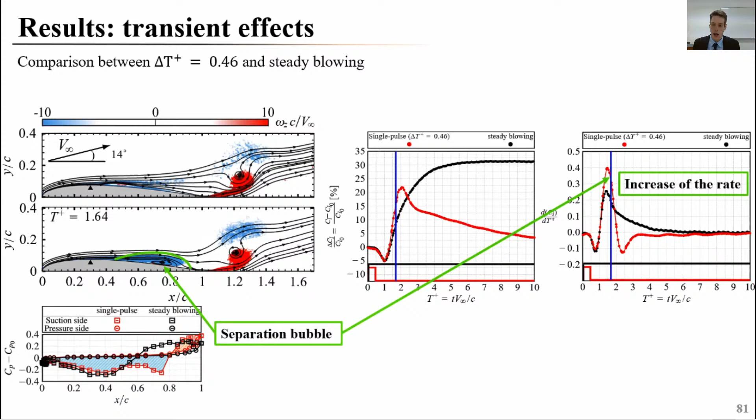I tried at last to explain this global effect by taking some points near the trailing edge and looking at the lift there. I found that the evolution of the pressure at this point was very close to the global lift evolution.

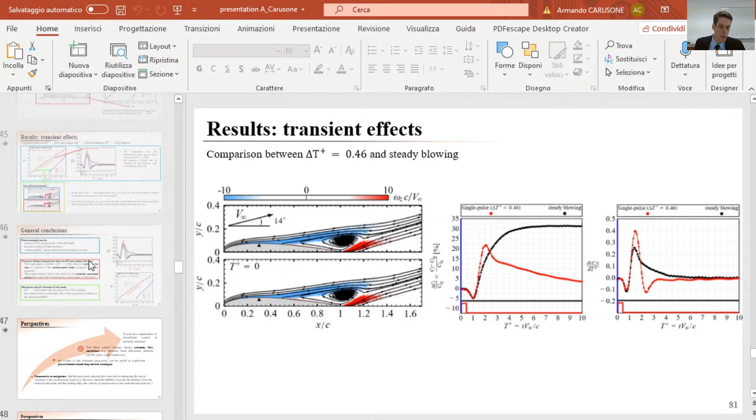This was quite interesting because if we would like to develop closed-loop control strategies based on the physics of the phenomenon, we could measure the pressure just at some points near the trailing edge and infer what's happening to the global lift evolution around the airfoil—like a sort of indicator. This is very interesting. However, I agree we must also look at the integrated effect of the pressure over the whole pressure surface.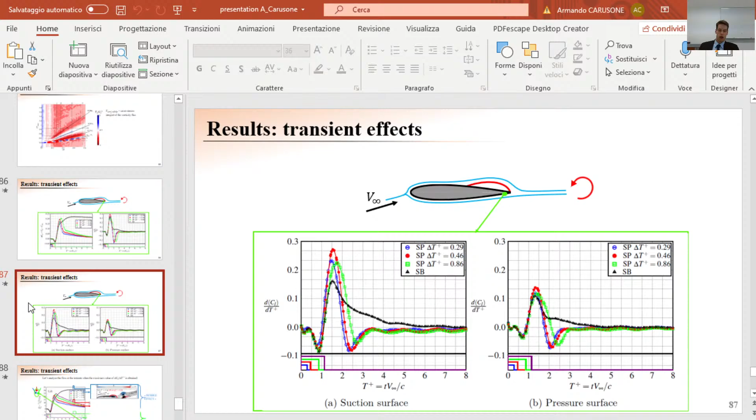So if we now look at incidences below, for example, 8 degrees, the ratio between the pressure drag and the total drag is below 50%. So the skin friction drag has a really big impact on the total drag. For this configuration, you are completely right, and indeed if we perform actuation here, we will not only modify the pressure drag a bit, but we will surely increase the skin friction drag, because we are putting momentum in the boundary layer, and this increases the skin friction drag.

So we would expect the drag to increase even higher than what we measured. However, for high incidences, for example above 12 degrees, and especially above 14 degrees, the total contribution to the drag is given by the pressure drag, because we have a big separated region. So at these incidences, when we experience an increase of efficiency, it's a real increase of efficiency, even taking into account the skin friction drag, because its contribution to the total drag is very small, less than 10%. So even if we increase the skin friction drag a bit, it doesn't have a big effect on the total drag reduction we obtain, for example, at 16 degrees.

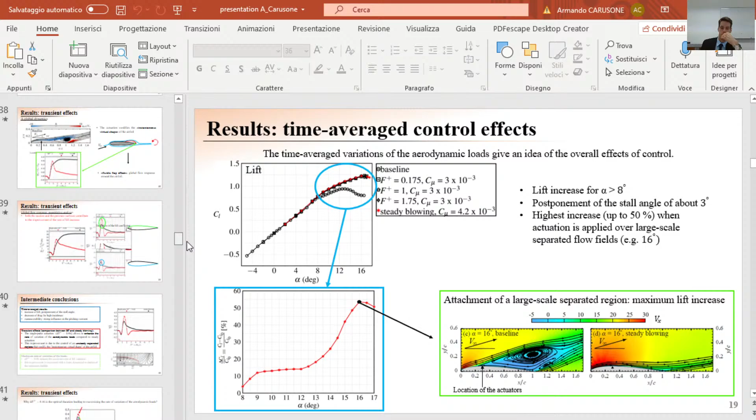And showing that, I believe, for a shorter period it doesn't work as well as when it's a bit longer, and if it's even longer you're getting back to something close to continuous control. Yes, exactly. So I had a question on that, because if you have constant... yes, exactly, it's on this one. Okay, so 0.46 for what you're looking at is basically an optimal.

On what you're looking at, however, I believe that if you have constant actuation you have the same mass flow rate as a function of time. So you're putting more energy into the flow in the case of 0.46. So have you tried to check, and if I understand correctly, when you have a period of 0.86, basically what's happening is that the acceleration and deceleration of the jet are too decorrelated, and you're not getting the transient effect that leads to the spike in lift. Have you checked something at constant energy of control? Meaning that if you're extending the period, you have to decrease the intensity of the jet, and compare all that, because then you're at constant cost.

Yes, you're completely right to ask this question, and I think it's important to clarify this point. Unfortunately, I didn't check changing the duration of the pulse while keeping the same mass flow rate, because we had to fix a parameter that was the same for every duration, and we fixed the maximum velocity. So we performed all durations of the single pulse with the same maximum velocity, fixed at 5 times the free stream velocity.

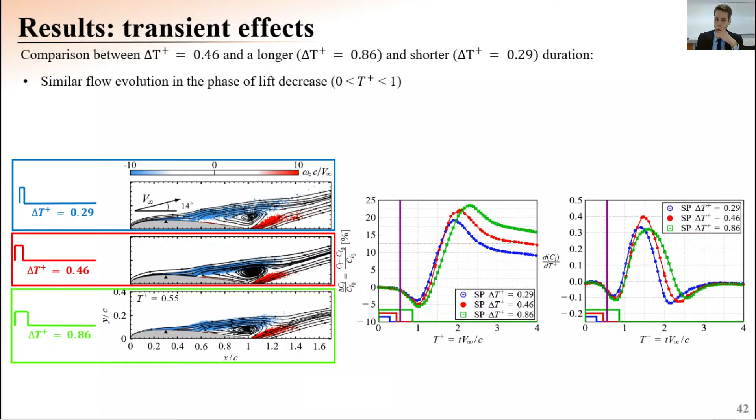One of the key differences is that we don't have wings, we have tailplanes, and it's a very low aspect ratio, so highly three-dimensional flow. How do you think your work would translate to something where the flow is actually perpendicular to the leading edge? When you look at straight lines, it's something like 20% of the span, maybe 50% of the span, but not more. Do you think you could still achieve some kind of control, or would the flow be too complex to control?

And the second question, maybe you can answer both together. You mentioned gust often, and when you do your control you have a spike in lift, but there's something you don't control much: the relaxation time to reach something identical to your inlet condition. However, with a gust you don't control anything - you have the gust with the velocity it has, the direction it has, and the length it has. So sometimes you can get hit twice in a very short amount of time, or a very long gust, or something very short. Do you think that down the line this is something you could control, meaning the length of your controller and being able to control everything in a very short amount of time?

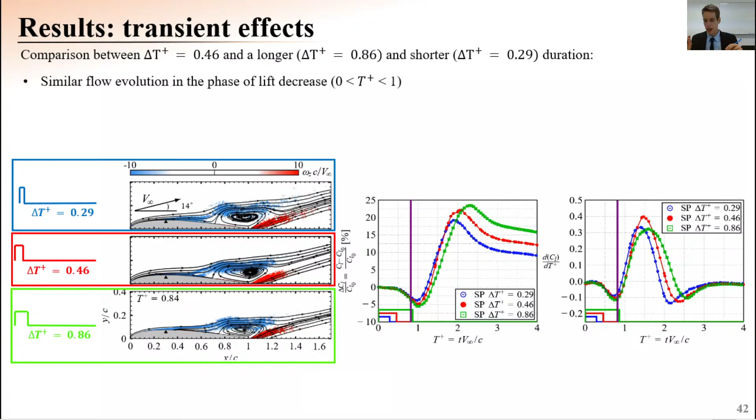However, we have seen in the transient case that we are exploiting two different dynamics if we are far upstream of the separation point versus, for example, very close or even inside the separation zone. This can be clear by looking at this picture I presented before.

We see that for the case when the actuation operates from upstream of the separation point, we have a very similar behavior at 12, 13, 14, and 13.5 degrees. But at 16 degrees, when we operate from inside the separated region, we have a different behavior, because we are generating a very different flow dynamics response.

However, in the time-averaged case, our interest is to reattach the flow field, no matter what the transient dynamical evolution is that leads to this attachment. So whether we are upstream or next to the separation point, we are able to reattach the flow field, and this will lead to a lift increase, but we are not interested in the dynamical evolution that leads to this attachment.

Instead, in the case of the transient evolution, the position of the actuation really changes the dynamical evolution of the flow field induced by the actuation onset. So there are two cases to treat separately: the time-averaged case, where we're interested in reattaching the flow field, and we've seen that actuation just upstream of the separation point is widely known from literature to be best.

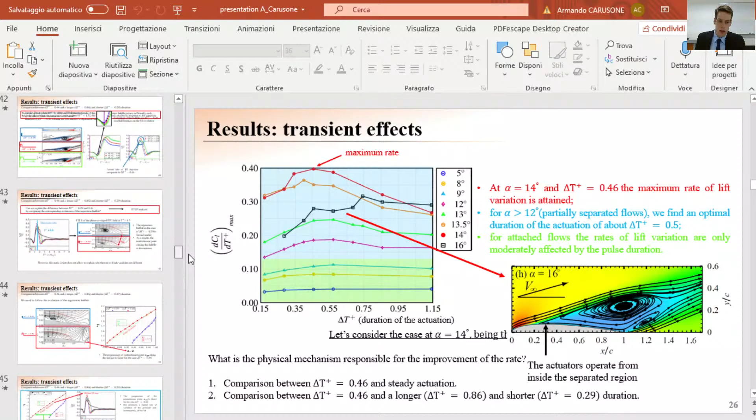I think that if I take this case, for example, the bubble does not develop. In the case of the PIV measurements, they are quite close to the surface of the airfoil. The resolution, the accuracy of the PIV is accurate all over the field, except in a region which is 5 millimeters in height. I don't think that in a region of this height we can have the development of a separation bubble that we didn't capture.

However, I am also sure of this because I looked at the pressure variation. I don't have the picture on the slides, but in the dissertation we can compare the variation of the pressure for the case of delta T plus 0.86 with, for example, 0.46, and we notice that this negative pressure, this suction that is generated by the bubble, is not present for the case of 0.86. This gives an idea that the bubble is not developing in this case. So I'm pretty sure that there is no bubble developing earlier for the case of 0.86.

And you see it on the pressure distribution for the last time, since it appears at the end, for this last time which is T plus equal to 2.23 or something like that. Do you see the effect of this vortex on the pressure distribution? Yes, but I clearly don't see the development of the bubble.

Okay, yes. First of all, let me clarify a point before answering this question, because this field that we are looking at is averaged, but can be considered as instantaneous because it's phase averaged. The measurements are phase locked to the actuation signal, and so the lift that you see here in this picture is phase averaged based on many phases. Actually, we can consider it as instantaneous.

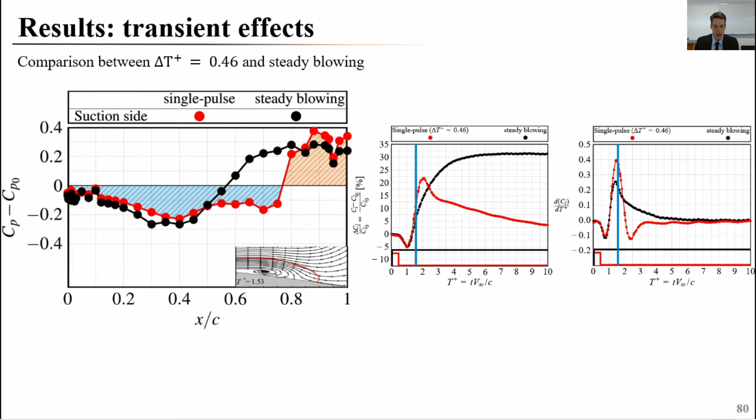What increases the rate of variation of the lift is the fact that the rate of variation of the pressure per unit time, the temporal derivative of the pressure, is higher than in the case of steady blowing. I checked it and compared the evolution of the bubble with the rate of variation of the pressure per unit time, and I've seen that it's highly correlated with the presence of this bubble and a higher temporal derivative of the pressure. So it's actually this bubble that allows the rate to increase.

There is a very strong correlation between the presence of the bubble and the higher rate of lift increase, because it's associated with a higher rate of variation of the pressure per unit time.

Yeah, I think it's my fault. I want to clarify on a phase average: for example at T+1, you have a lot of different instantaneous fields, which give you different pressures. Ah yes, okay, now I get it. It's the dispersion of the pressure and velocity field at this time. Wait, I'm sorry, no, I misunderstood, I didn't understand the question. Actually your question is to correlate the bubble with the dispersion of the pressure at this instant. If we see the average field, you have an average evolution of the phenomenon, but I am asking if on instantaneous fields you have a lot of differences, or if you are really close to the average field.

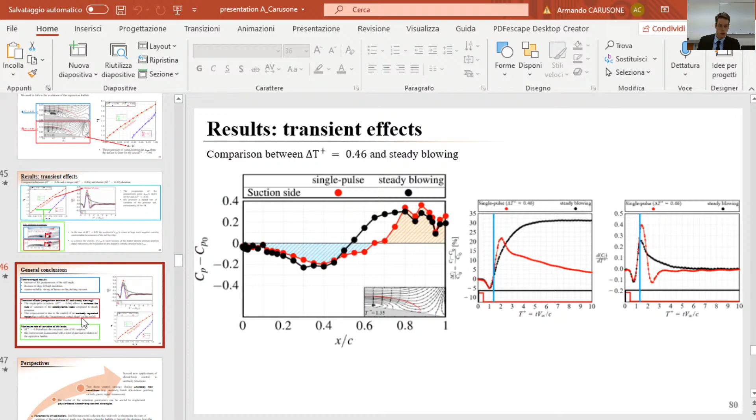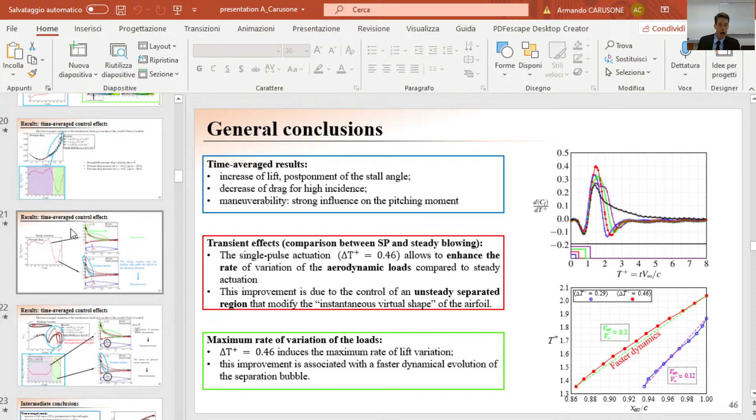Yes, now you had presented, I think in transparency 46, that the drag decreases at high incidence, you said so I think. Well, at the moment you said that you also have a decrease of drag at high incidence. Maybe I did not note exactly the number of the transparency. I'm sorry, so I think this is the one. Is this the one, professor? Yes, oh yes, okay, okay.

So you say that for the high incidences you obtained a decrease, as we see, yes, of the drag. Can you explain physically how this is achieved? This is very important, of course. I expected this question because it's a very important question, I think. For this reason I prepared a special slide.

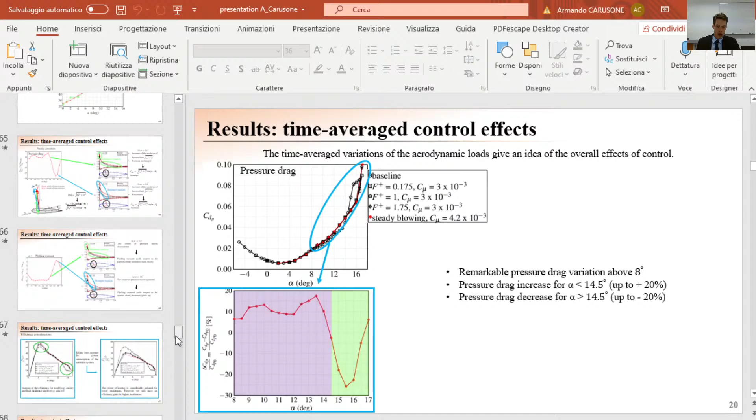I hope I will find it. First of all, it's the first thing to find this slide. Just one second. Yes, this one, okay. Now if you look at this slide, actually, I will present it very, very fast because it's getting late, and my advisor also tells me it's getting late, so I will try to present it very fast.

So actually, if you take for example the quarter chord and we apply the total aerodynamic force at this point, we can decompose this force into the body reference system, obtaining T and N. So we can write the coefficient of the force as the square root of Cn squared plus Ct squared. So if we now want to get the drag, the pressure drag is basically the square root of Cn squared plus Ct squared times the sine of the angle alpha, that is the incidence, minus the angle theta, which is the angle between the normal to the chord and the force direction. So if we retain this expression, CdP equals square root of Cn squared plus Ct squared times sine of alpha minus theta.

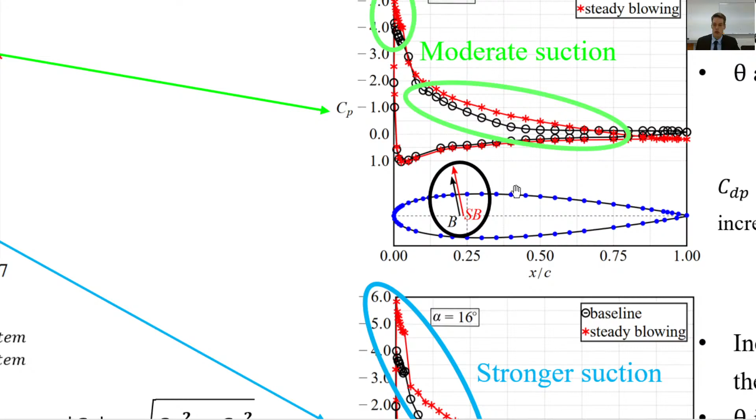Now let's compare the two cases at 14 and 16 degrees. At 14 degrees, the actuation is able to increase the modulus of the force because it induces a suction over the upper surface of the airfoil. However, since we have a moderate suction near the leading edge, it's not able to bend this vector. If I make a zoom, we see that the black and red vectors are almost parallel, so the angle theta is not changing. So what we increase is just the modulus, and when we calculate the pressure drag, we have an increasing modulus but no variation of the angle, and so actually we increase the drag.

The opposite is instead obtained at 16 degrees, where we increase the modulus, but since we have a stronger suction near the leading edge, we also increase the angle theta, and so the sine of alpha minus theta will outweigh the increase of modulus and lead to a drag decrease. So this is from a mathematical point of view, but physically, we can interpret this as: at 16 degrees, since we have a stronger suction near the leading edge, we are actually pulling the airfoil in the upstream direction, and this helps decrease the drag. For 14 degrees instead, the predominant phenomenon is the suction near the half chord, which helps pull the airfoil in the downstream direction, and this corresponds to a drag increase. That's why we have a strongly different behavior. The key point to understand this is that at 16 degrees we are able to bend the aerodynamic force resultant, and so generate a drag decrease.

Okay, this is a very important effect, very, very good explanation, thank you very much. I have a last question: the Reynolds number range where you worked, I think for wings of this kind, don't you have transition to turbulence effects in the upstream region? Or is the boundary layer always turbulent from the beginning?

And of course, we wanted to have in this committee also Jean-Pierre, who is from Dassault and very involved in all the controls for a long time. And we wanted to have Guillaume also, because we were thinking that maybe during the transient maneuvers, even if it is maybe optimistic, playing with the separated flow might give some degrees of freedom to act on the dirigeable. But this would require more discussion.

It was really a nice period to work together on these problems. Thanks, Jean-Paul, for helping us at the beginning. It's very strange for us because we are really in the room where most of the discussions took place. The defense is really in the same place. Armando was always very enthusiastic. So I thank you very much for being here on Friday evening so late. And I thank you, Mariana.